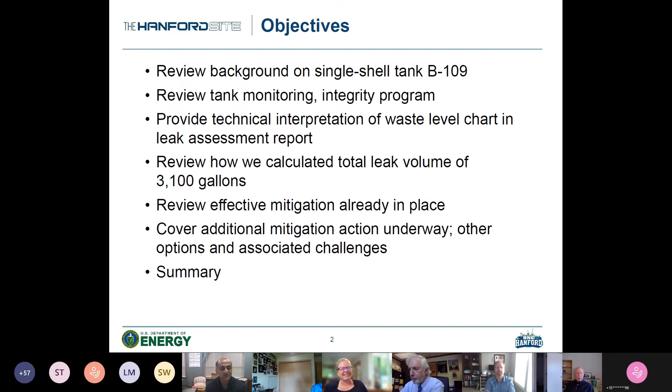So tank B109 background, it is a 530,000 gallon underground single shell tank. So this is one thing I think that is really important. In contrast to some of our other tanks, this is a type 2 tank. It is 75 feet in diameter, but it's 10 feet shorter than some of the other tanks, being that it's about half the size of a 1 million gallon tank. So something for us to recognize. Not every tank is 1 million gallons out at Hanford.

Some are 530,000 in this particular type 2 tank, made of a 1/4 inch mild carbon steel with some knuckle plates on the bottom. And it's a dish bottom with a 4-foot radius knuckle in B tank farm. So a little different than what I've talked about before in the 1 million gallon double shell tanks. 1946 to 76, contaminated liquids. Obviously, we understand that. Lots of work, bismuth phosphate waste, so forth, so on.

Over years, some evaporator waste over 30 years. After that, in 1985, we did go through an interim stabilization campaign for all of these single shell tanks, and the pumpable liquids were removed as part of this. And I think everybody is aware of this history there. And pumpable liquids, that's an important parameter.

Every one of these tanks is going to have some residual liquids, and those residual liquids are not pumpable, so they're not removable with our current technologies, but they will be removed over time as we get into our waste processing mission. Today, the tank does have a solid salt cake and sludge and residual liquids in it, and the numbers, let me make sure I get these exactly right, are 51,000 gallons and then 13,000 gallons of what's called drainable interstitial liquid.

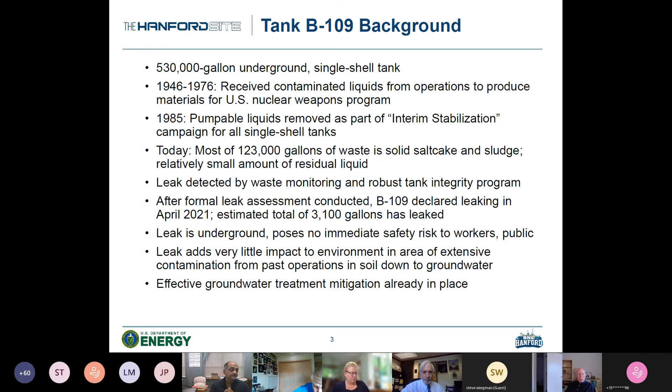So this is our tank monitoring and integrity program. We have now implemented RPP 9937. It is the SST leak detection and monitoring functions requirements document. We are now on Rev 4 of that. Rev 4 was signed off earlier this year, and now we'll be implementing the requirements of Rev 4.

So we take periodic waste level readings. It really depends on the tank itself. Some are quarterly, some are monthly. We use two types of waste level gauges. One is an ENRAF if there's liquid material that's on top, but primarily liquid observation wells that measure the levels of liquid in the salt cake and sludge.

And so I do want to be clear here, the way an LOW works is it's a fiberglass tube that goes into the waste itself. Then you measure through some scattering measurements what is the level of liquid in there. As we know, the waste in these tanks does move. There's lots of characteristics of these wastes. And so as we go through the process of liquid observation wells, that's the type of information that we use to calculate what our interstitial liquid levels are.

But those liquid observation wells and the interstitial liquid levels also, we know from experience in these tanks and a lot of experience within operations and engineering groups, there are multiple things that impact what the ILL does. And that's the process that I'll go through on the chart itself.

Periodic tank interior inspections using remote cameras. We not only do this in the SSTs, but the DSTs. As you might imagine, it's not really easy. Cameras in general, some of the challenges associated with this, certainly lighting in the tanks. We've gotten better and better at lighting in the tanks, new technologies and cameras that can last longer within the radiation environments that are in the tanks, as well as making sure that the camera lens doesn't fog up. So lots of challenges with getting into these tanks through some small risers.

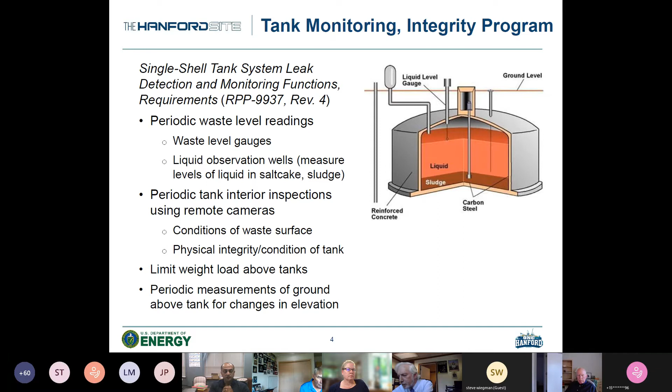Okay, next slide, please. So this is the report that was... Can you see my pointer? Oh no, you're sharing. Okay. Yeah. Sorry. All right. Let's see if there's a way to do that.

So this is the ILL, interstitial liquid level, report that is actually presented in the report itself.

As you see here, I'll just go in through the first, or I don't have a pointer, but let's see if there's a way to do that. So if you could start all the way. That's my pointer. So if yeah. I don't know, let's see if you can boss me around. I'm not sure I can.

That's okay. I'll try to explain it in the context of the Y and X axis. On the X axis here, you'll see that it's actually 24 years presented of the interstitial liquid level. And then on the Y axis, it's the level above the tank centerline bottom, and that goes from about 40 inches to about 44 inches. So that's the graph. For us to remember, it's about 2,750 gallons per inch.

And so you see from about 2004 over to 2013, 2016, about a steady increase average, but as with all empirical measurements in an LOW, we see this in lots of tanks. It's not a perfect line. Our LOW, as I said, the waste does move in these tanks for a whole variety of reasons. Salt cake does tend to collapse over time, and then that would have waste that goes out or waste subsidence. Salt will fall in on the weight of itself.

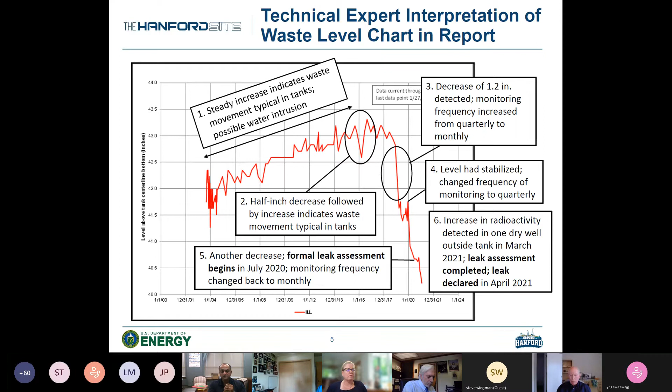Okay. So how do we estimate the total leak volume? I'm going to try to do this without a whiteboard, which I usually do a better job of, but it's 2,750 gallons per inch, and it's a 75 foot diameter tank in the cylindrical region of the tank. The composition is about 41% sludge and 59% salt cake, excluding any supernatant that's estimated in there.

Now, waste on the surface is salt, and you can see the visual images here. In a video it looks a lot better, but as we capture screen, sometimes it doesn't go real well. We pore over these videos slowly, hours and hours of video. The salt cake waste porosity is estimated at 24% based on some of the knowledge of the types of waste we have in here, some reference documentation.

So the liquid present in the waste is the combination of the free liquid on the top plus the interstitial liquid. So the free liquid on the top of the volume is equal to the 2,750 gallons times the surface liquid fraction. And what you see as we go through the video is that we estimate what that liquid fraction looks like. So 2,750 in a 1 inch period. If the entire 1 inch is not covered up in liquid, whatever the fraction of the surface is covered up in liquid. Okay.

And then the surface solid fraction is 1 minus the liquid fraction, and that's the solid fraction that's not part of the liquid calculus there. So then the interstitial liquid volume is equal to the 2,750 gallons times the solid surface fraction times the porosity for the salt cake as well as the sludge. So some of the details of the liquid here.

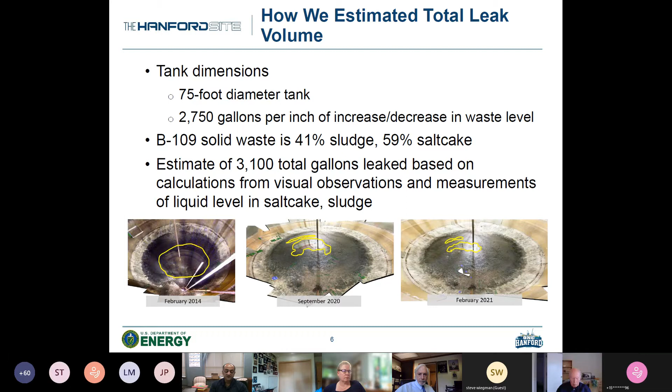An old project determined somewhere around 52 million gallons of contaminated liquids were discharged into the soil and disposal sites in and around B complex, and about 360,000 gallons of contaminated liquids from past leaks from multiple tanks in B, BX, and BY farms. So this groundwater treatment system is a large network of subsurface piping. It takes it to a pump and treat system that then removes the contaminants so that it can be released.

So in context of that, this treatment system is pumping around 6 million gallons a month, capturing and removing this contamination. And as I mentioned, in terms of risk versus margin, that margin of how much liquid is being removed and treated versus leaks that contribute to that, that's a large margin of the capacity of the groundwater treatment system in terms of additional contamination that may be due to this leak.

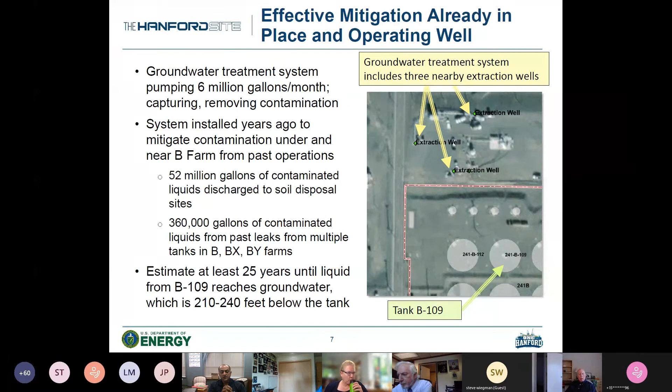Okay, next slide, please. So I wanted to go through some other mitigation options and some challenges with those mitigation options. We're already expanding our groundwater treatment system by adding an extraction well. And then one of the things that are important to us is to install ventilation to evaporate liquids in the tank. It does require, obviously, in B tank farm, some new infrastructure in terms of power and utilities,

something that's under consideration. Ventilation is a good way to remove, if there was evidence of water intrusion on the surface, water from the tank itself. So kind of two thought processes there. One way to prevent leaks is to remove the water by ventilation. So that's a process that we've used pretty effectively in some other tanks.

Install surface barrier to divert precipitation. And we've done multiple surface barriers in multiple tank farms now. And that really is to prevent recharge from any rain that then would cause the contamination to be transported faster with rain recharge. So those are effective techniques. Remove pumpable liquids again. Obviously, this would require new infrastructure. And this really tends to have a limited effectiveness.

The reason that interim stabilization used these particular terms, pumpable liquids, is that the liquid must be available and be able to move to the spot in which the pump is. And so we have limitations on pump technologies, as well as how the tank behaves and how the water moves to the one spot where the pump is, which is the limiting factor. And that was a lot of work done in interim stabilization.

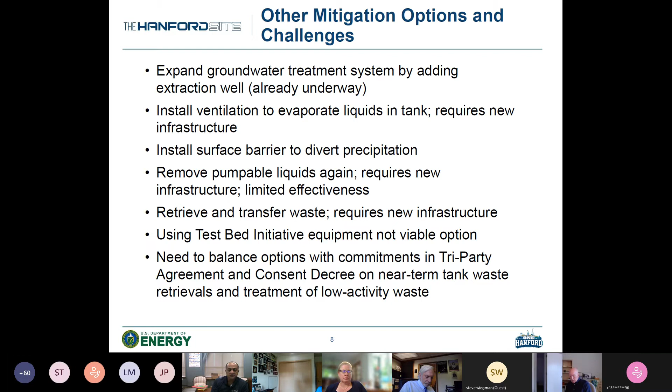So, all right, and then lastly, I believe this is the last slide. I think it's from the standpoint of how B109 was monitored, but not only B109, it is all of our SSTs. We have a document 9937, and we take the requirements in that document seriously. And we have a technical, rigorous process that follows not only a formal leak assessment process, but we track every piece of data that we get. The entire engineering team tracks every piece of data. They are careful. Any indication is thoroughly technically evaluated.

We do know as we go through that, and you saw the choppy work of the ILLs, they can be caused by multiple conditions. In any case, any change in those ILLs is tracked all along the way. If we see some significant changes and the waste doesn't restabilize, then we enter a very comprehensive formal leak assessment process to go through all of the data in this particular tank's history. And that includes analysis of leak rates.

The same technical process was followed for B109 as we increased, and I think you saw that in the graph. We quarterly monitor and we do visual inspections, but if we see any changes that we'd really like to get a better trend analysis on, we'll go into quarterly, we'll go into a monthly analysis. If it restabilizes, we'll use all that data, and our programs continue to evolve in that.

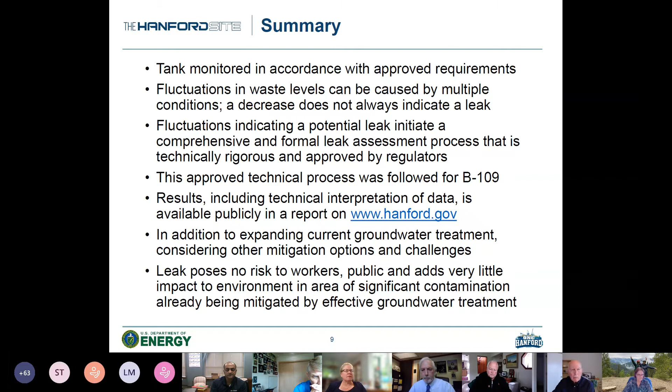Right. I'm going to check in with Nina before we do that. Are you with us, Nina? I'm here. You were a little echoey there, so I wanted to be sure that you were ready for me.

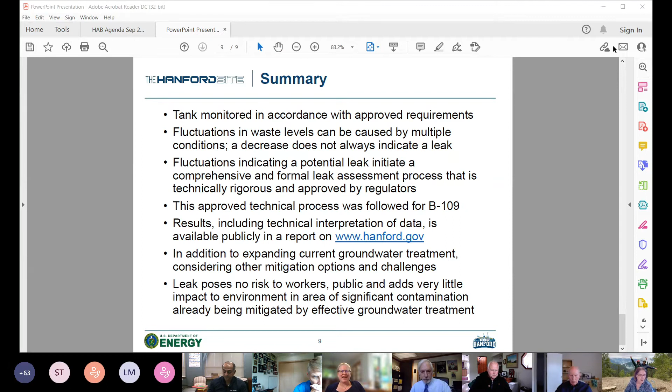Just for people who don't know me, I'm Nina Menard. I work with the Department of Ecology, and I am going to speak to some of what Karthik said in his presentation. He did an excellent job of presenting the RPP 9937 process, and it is a difficult thing to determine whether a tank is truly leaking or if there's other factors that come into play.

Some of the other things I do want to mention, though, is as a regulatory agency, we are committed to abide by our regulations. And so allowing a tank to continue leaking and not having DOE address that leak is probably outside of us applying our regulations. We are still working with DOE to come to an agreed order on this issue of a leaking tank.

Some of the things I'd like to address that was presented here as remediation or mitigating technologies that were being used. Ventilation was one of them. The only other time I know of that ventilation has been applied, and my knowledge is limited, is on another tank. And although ventilation does evaporate liquids, it is only good on evaporating the liquids at the top surfaces of the tank. It does not really get down to the liquids that could be entrained, could be free liquids that would reside on the bottom of the tank, and that's where the leaks usually are occurring.

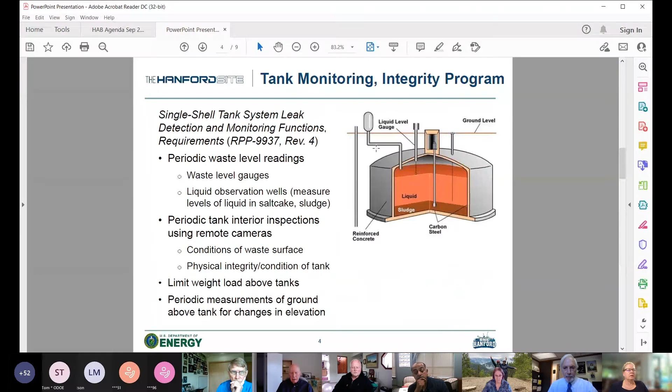I have it if we need. This one. This is the one you're looking for? Yes, thank you.

So first question is, why are we showing the slide as of months ago? Isn't the current liquid level now down to about 39.3 inches, representing another significant loss that would be several hundred gallons as of the August 14th data point?

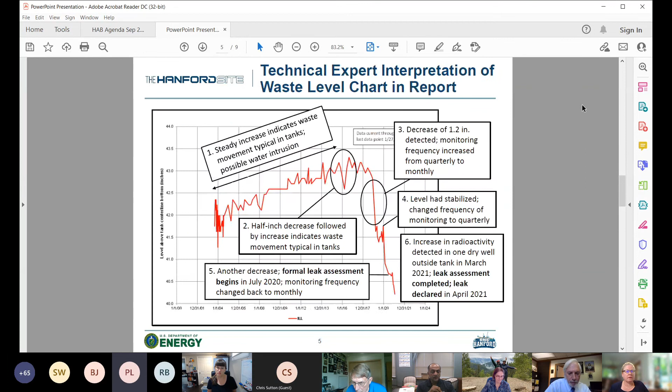Anyway, any thoughts on that? And maybe it's like a totally silly idea, but I'm just curious. So I can take the question on how ventilation works and evaporation. So typically the way we have active evaporation is we will have a liquid surface. So Ruth, if you could go to the surface pictures. Yeah. And I don't remember which slide. Oh, there it is. Okay.

So in a tank that has a significant amount of supernatant on top with a liquid portion, typical of a double shell tank farm, you'll have a lot of liquid on top. The way evaporation works is that'll be at a particular specific gravity. We will take that liquid, send it to an evaporator via transfer, and then send back a much higher concentration solution with a lot less water. So that's an active evaporation. So active evaporation in this, we'd have to dissolve the salt and then send it back, which means adding water to get rid of the same water we added. That's one

piece. The second piece is in ventilation. What that means is that we would run air over the surface of the existing liquid and remove the water. And I think, as Nina might have mentioned, it's very effective at removing water on the surface parts. But as you go through that process, it reaches some equilibrium condition. And we talked about deliquescence and efflorescence and dry. It will reach some equilibrium, and it will pull water at some slower rate than just water on the surface.

And we saw that in the one other tank that we had, as she mentioned, had an exhauster on. It worked very fast at an early rate, and then it slowed down to a plateau equilibrium condition, pulling out water that has to transport to the top to get there. So very different in active evaporation versus ventilation running over the surface of the tank.

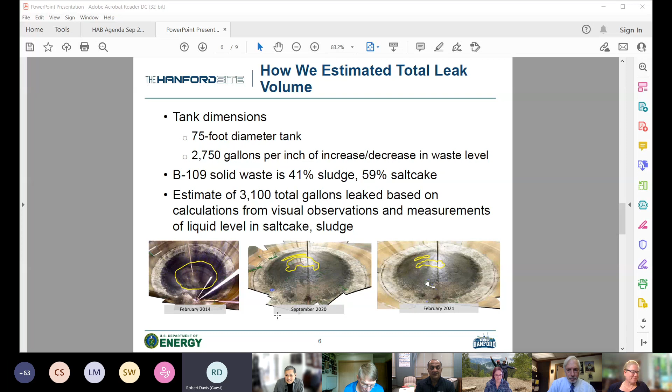Rob Davis, I want to check with you to see if you've got a comment. Our conundrum is we actually can't respond to questions that come up during public comment. Right. I understand that, and I'll try to think of a way of just making statements. First of all, I'll just remind everybody the WTP should be working by now, and we wouldn't have this problem. So fully fund the pre-treat and HLW.